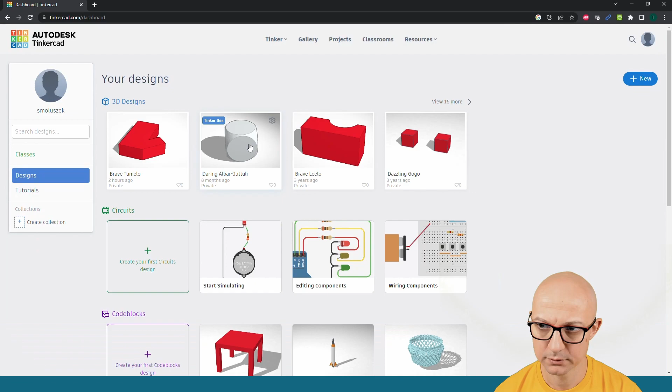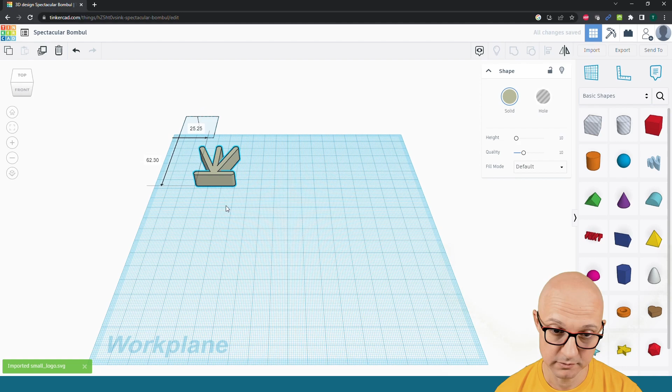We are going to create a new design, a 3D design, and this will be pretty simple. We'll just import the shape of our logo, which is a small SVG vector file. Yep, there's some automatic scaling happening, and here it is. Looks similar, right? And then we'll try to make a coin shape.

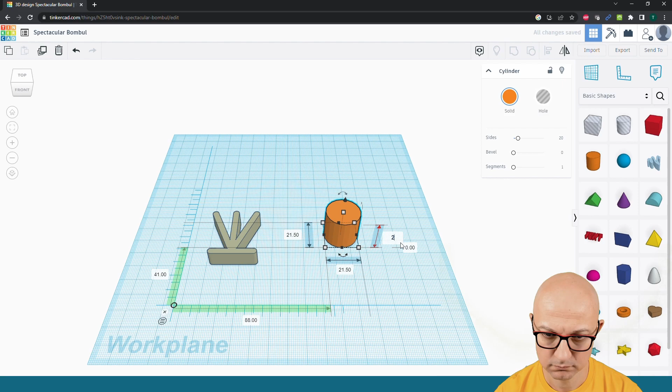So that's a cylinder, and we're going to use the ruler over here, and set this to 21.5, because that's the dimension of the Polish 2 zloty coin, and the height is 2 millimeters. So that's the coin.

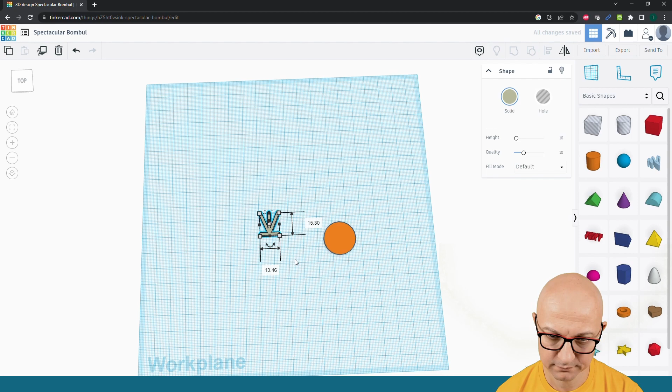We can get rid of the ruler, and as you can see, our logo is too big. So we'll scale it down, dragging this dot here, and if we press the Shift key it will keep proportions. Maybe this is the right size. Let's see. Oh, still probably too big, so let's shrink it a bit more. Something like that. Whoops, not that easy to grab it. Yeah, I think it's fine.

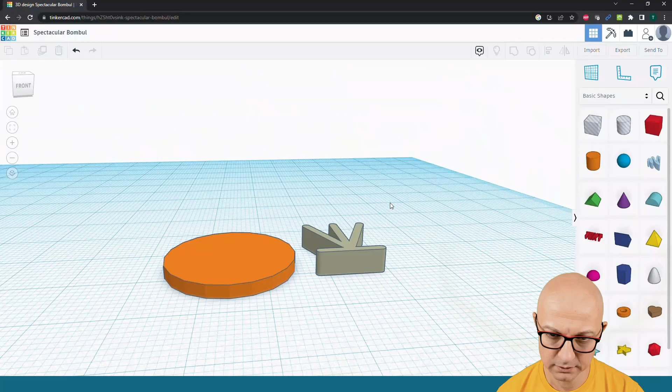So what we will do next, I'll zoom in a bit so we can see some more details. As we can see, it is bigger, but it doesn't really matter, because what we want is to have a hole of this shape.

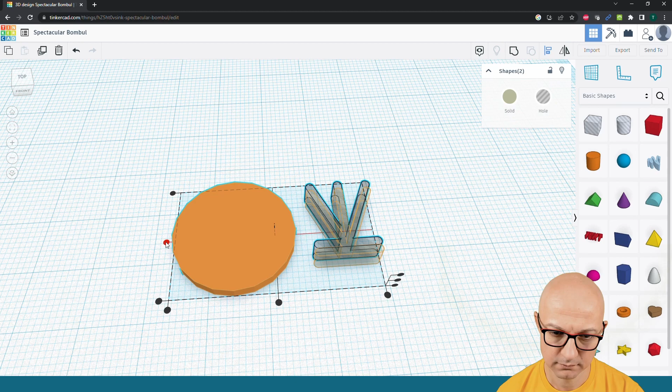So we can simply switch from solid to hole. Now our logo is a hole, and we just need to put the hole in the center of the coin. Select both things, press the L key for the alignment tool, and align it in the X and Y axis, and here it is. You see the hole is bigger, but it doesn't really matter because we'll just be cutting.

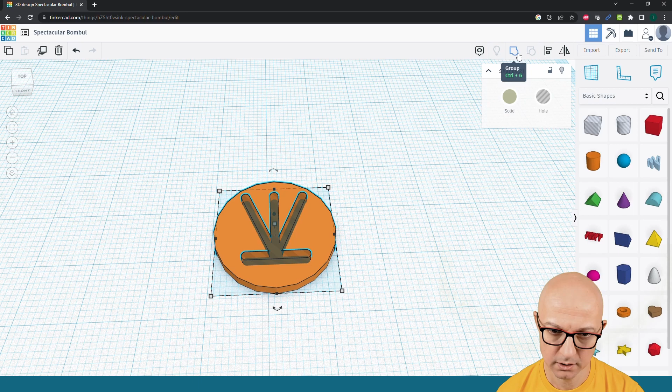So again, select both of these and group them with Ctrl G or the button up here, and ta-da! Here is our thing. The last thing we need to do is press the export button. So we select the thing, press export here, and select shape as STL file, which is the file format we usually use for 3D printing. And here we have it.

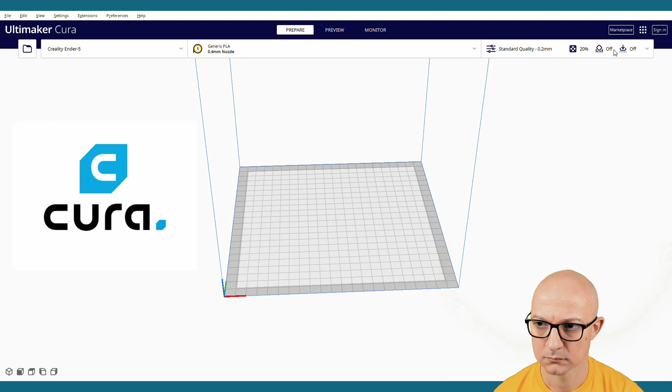Now we switch to Cura. As you can see, I've selected the printer I'm going to use, which is the Creality Ender 5. All the rest is pretty much standard.

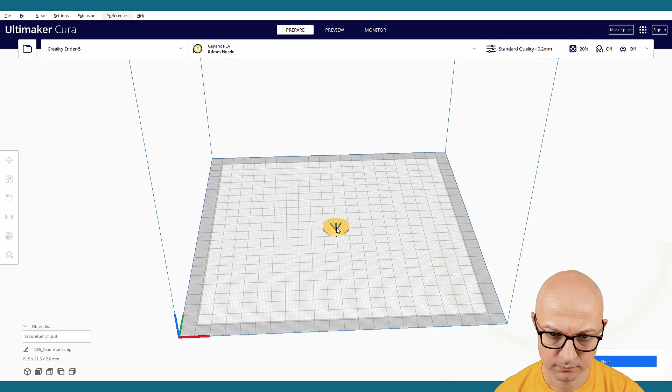Let's load our Taboretum chip. Here it comes. You can see it here at the center of the build plate. We can actually probably print more than one of these.

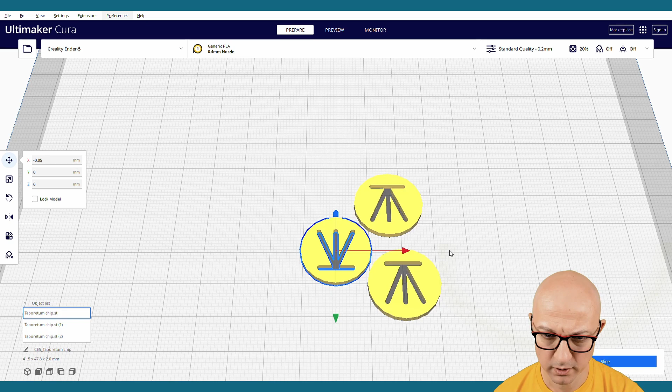So if we right click on it, we can multiply select it, or do Control M. So let's add 2 more. Don't ask me why Cura is arranging them like that, I have no clue. Daily I'm using other software. We'll talk about slicers next in some of the next episodes, but let's stick with this one for now.

Now we press slice at the bottom here, and we have standard quality up there, which is 0.2 millimeters and 20% infill. So let's slice it. Slicing is happening. And we can go to preview, and it says it will use 2 grams of filament, 0.7 meters, and will take 18 minutes to print. So let's preview the thing.

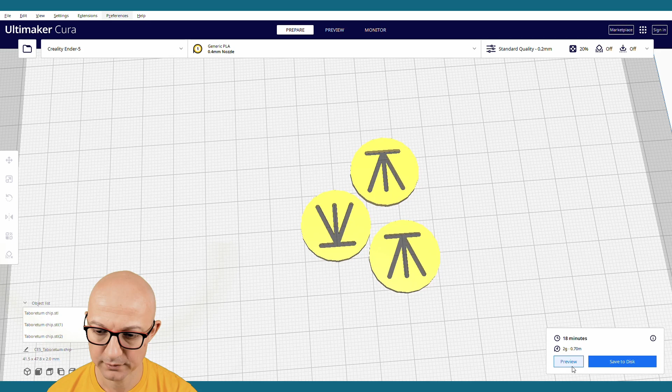And you can see now the sliced thing, and here on the right hand side you can see there's a layer number. If we go down, we'll see different layers. Let's go to the first one, and here you can see the lines, so how the printer will be moving and printing the thing.

So it will make first the one on the left and this one, then the third one, and then it will move up to the next layer. And if we go to the layers, the color shows the speed.

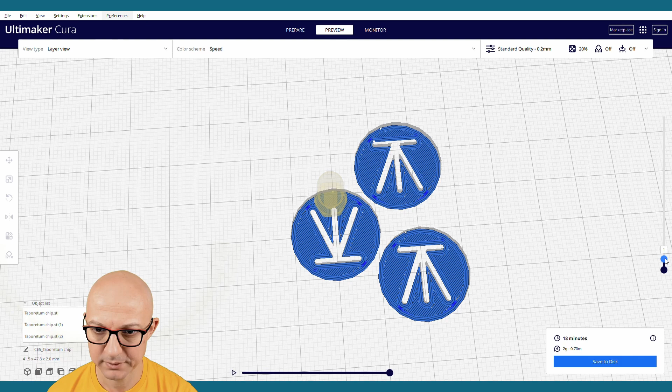The first layer is always slower to have better stickiness to the print bed, and then the second is already a bit quicker, and the third one even quicker than that. The fourth is yet another solid one.

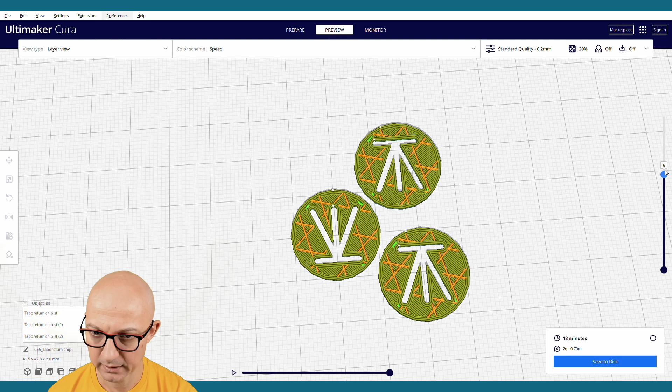The fifth is a hollow one, so you have just the infill in there. Then the sixth also is infill, and then again we are back to solid, because the default setting is to have 4 solid layers in Cura, right?

So let's save it to the disk. We can probably go to the same place, as a G-code file. So let's save it.

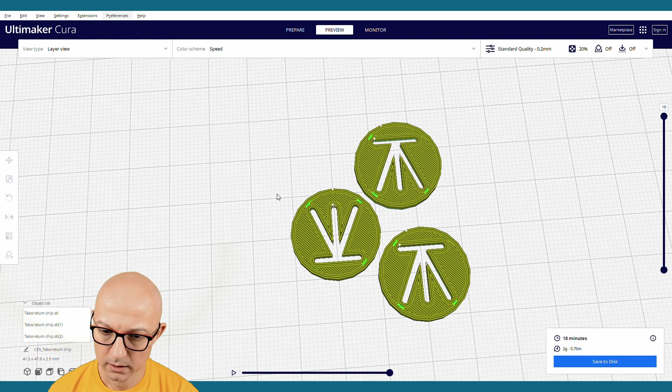And the next thing to do is get our printer ready. Now we'll be switching to the printer control panel. So we are at the third stage now, printing.

As you can see, the printer is already heated up because I had to change filament. It is now 220 degrees and the bed is 60 degrees. I don't remember exactly what are the defaults coming from Cura, so we'll see.

And what we do now is we add our file over here. That's Fluidd, so that's Klipper firmware on the printer. It's not a default thing. So I will just click upload and print.

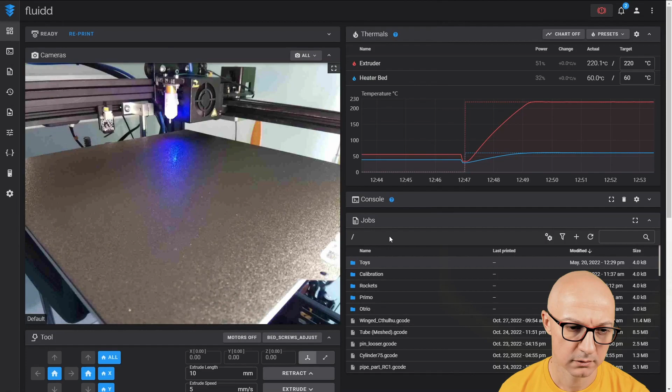Select our G-code file, open, and it's there, and you should be able to start to see if the thing is moving on the left hand side, and I will actually turn on some more lights so it won't be that messy.

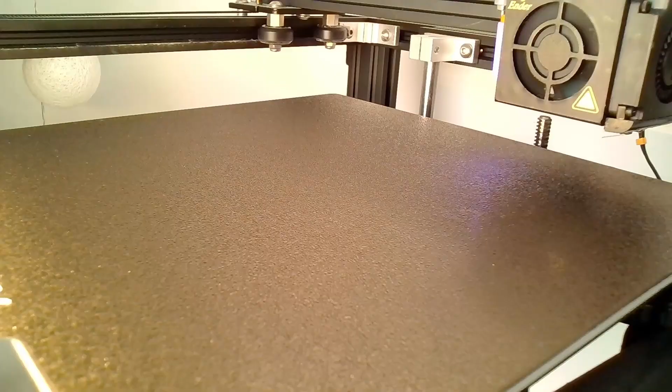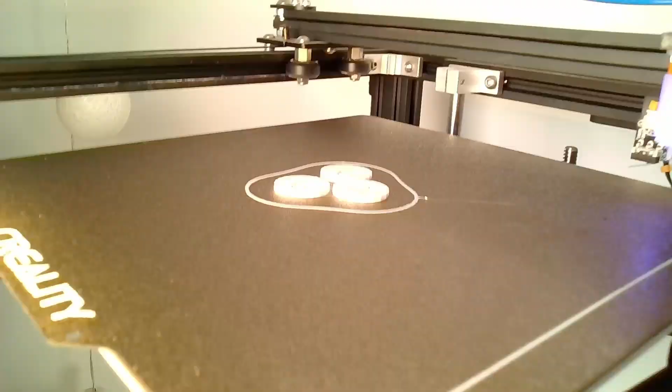We are done with the printing part, which is usually the most fun part. As you can see here, we have our shopping trolley chip with our logo here.

We actually have more of them, and if you look closely, it is the same size and shape as the original coin. What I don't like about it is that if you look closer, it is not actually a circle. It is rather a polygon, and that's a feature of Tinkercad.

Because today I was using tools that I don't use daily. I don't use Tinkercad, I use FreeCAD, and I don't really use Cura, I use Simplify 3D, and I will talk about it in future episodes, but I wanted to use the simplest possible tools. You can check in the description, there are links to those tools. You can try it yourself, do it yourself, print it yourself.

And the main message from this episode is that you have 3 parts of the process. So first phase is designing the thing. Second is slicing it, so making it understandable for the printer. And the third phase is actual printing.